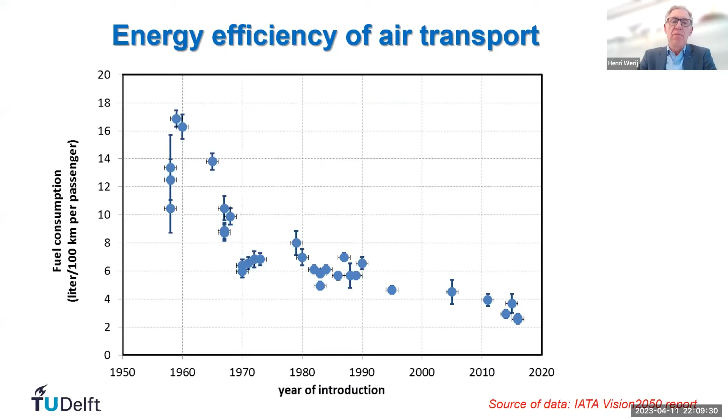First, a brief history of the evolution we've already seen in aviation regarding energy efficiency. What I plotted here is a graph showing the amount of liters of jet fuel per passenger per 100 kilometers, numbers similar to what you might see for your car. Of course in Europe it's liters per 100 kilometers, it's a bit different in other parts of the world. But what you can see is an improvement of about a factor of 5 over the last 60 years, due to advancements in aircraft design, weight, aerodynamics, better wings, and certainly improved propulsion systems.

The original jet engines are completely different from the turbofans we see nowadays, where a turbine drives the big fan in front, and only a small part of the air goes through the turbine, while the majority goes through the fan. Right now, the energy consumption per passenger per 100 kilometers is comparable to what you see in a really good car nowadays. Of course for a car it also depends on the number of people in it, but typically if you sit in a car by yourself, your fuel consumption is even higher than in an aircraft.

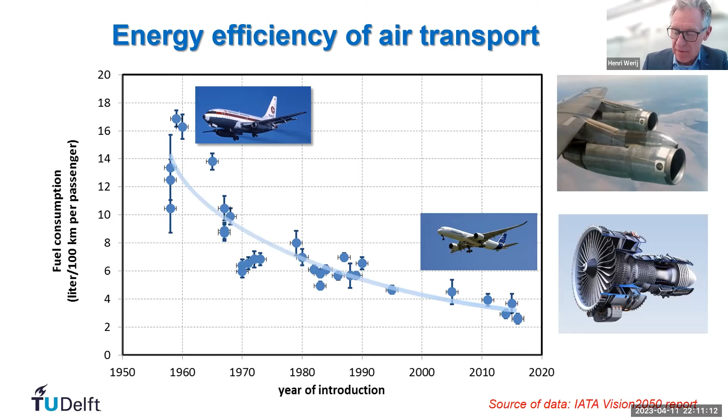So much for that. But at the same time, over the last 7 decades we've seen an exponential growth of air travel. More people travel, we travel more often, and we travel further, and this growth is continuing. Of course we had a dip due to COVID, but things are picking up again, and we see a doubling roughly every 15 years.

The improvements in aircraft design and propulsion engine design don't keep up with this enormous growth. This graph goes to the year 2012. Also, in the years 2013 to 2019, fuel efficiency worldwide improved by about 12%, but revenue passenger kilometers increased by 50%.

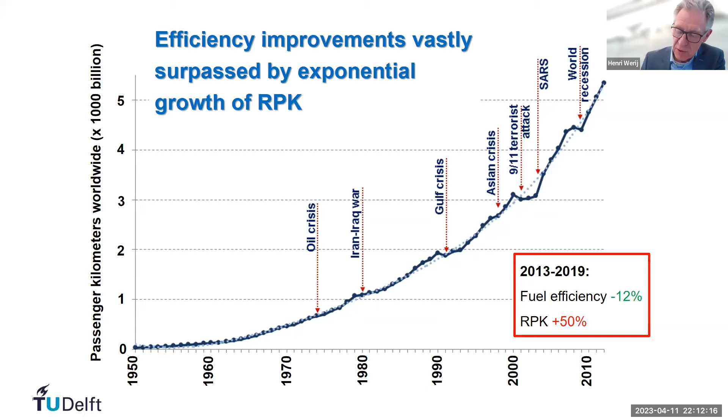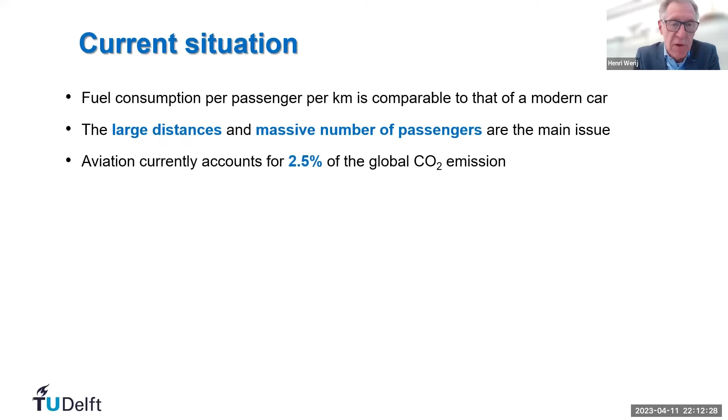That means the contribution in CO2 emission of aviation is actually increasing. If you look at the current situation, fuel consumption per passenger per kilometer is comparable to that of a modern car, but it's the large distances and massive number of passengers we are transporting. Currently aviation accounts for about 2.5% of global CO2 emission. And if in other sectors we are successful in bringing carbon emission down, the percentage of aviation will rapidly increase if we do not act.

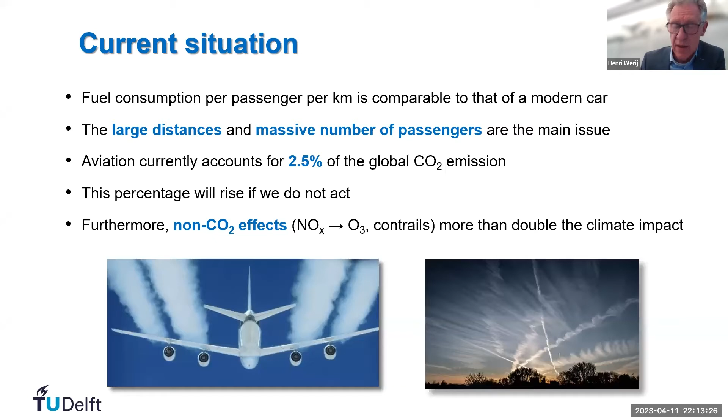So we have to do something. And on top of that, it's not just the CO2, it's also the emission of NOx leading to ozone, it's the emission of water, contrails, thin cirrus clouds that play a very important contribution to global warming. I will come back to that because this is a topic we definitely have to take into account right now when we start developing new aircraft and new propulsion systems.

So if we would like to do something about the climate effect of aviation, what knobs can we turn? Actually there are quite a few, and they are all interconnected. First, let's take a brief look at the forces acting on an aircraft. This is an aircraft in horizontal flight, where gravity is counterbalanced by the lift of the wings, and the thrust from the engines is counteracting the drag. Here we have to do something, and obviously we have emission, and this emission is something we would like to get rid of.

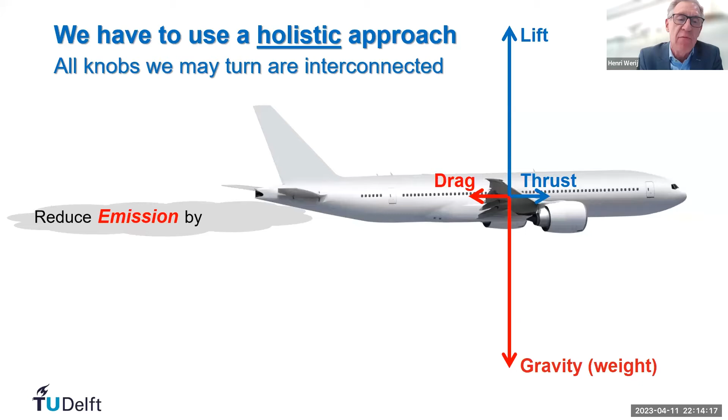How can we reduce the emission? First, we can replace fossil fuels by something else, I'll come back to that later. Whatever you choose, always make sure you have an aircraft that is as fuel, or should I say energy efficient as possible, which means a lot of lift, as little drag as possible, so high lift over drag, and a low mass, so it should be light.

Make sure you have energy efficient and clean propulsion systems, but also think about at what altitude do we fly, in what area or region do we fly, and how can we counteract the non-CO2 effects. And finally, if possible, use another transportation means than an aircraft. We don't always have to take a plane.

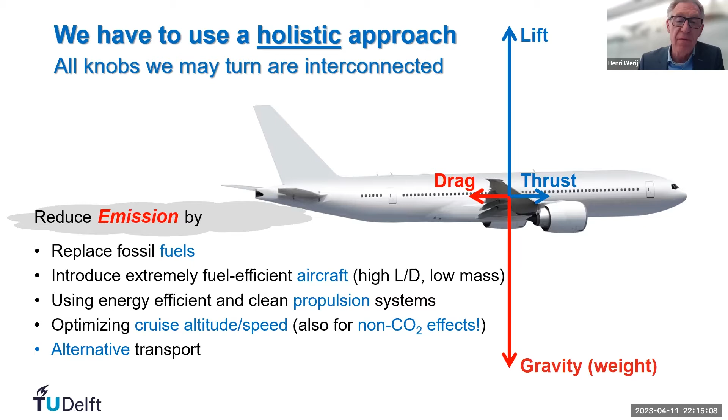So let's start with the first point, replacing fossil fuels. Well, that sounds easier said than done. What are the four main options that we have nowadays?

First of all, full battery electric. You see a lot of talking about this. Nearly every week it looks like a new company starts that claims they are going to fly huge distances, at least several hundreds of miles, using full battery electric planes. So that could be an option.

But electric could also rely on hydrogen and hydrogen fuel cells. Finally, hydrogen can also be burned directly, like we burn jet fuel, the kerosene, right now in a combustion engine.

You can use hydrogen, or we can replace fossil kerosene by sustainable aviation fuel. It could be made as biofuel, or even better - and we would have to do that if we need a large amount of fuel, where the bio route is not going to work, simply because we need too much - use electricity to ultimately create fuel again, just like the fuel we are using nowadays. Biofuel is not an option to replace everything, because we simply need too much land and too much water.

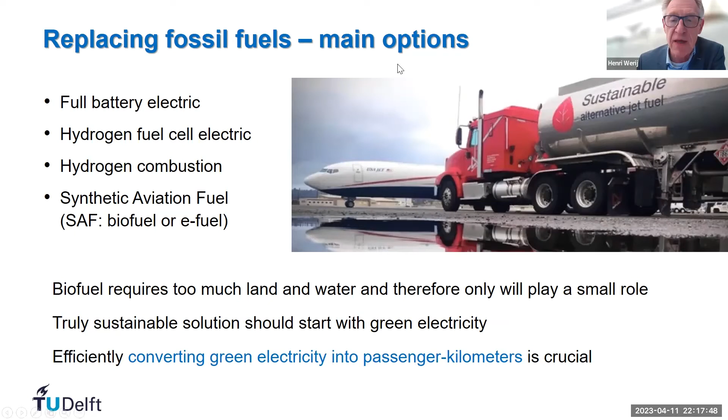So how do the four options compare? Well, the first thing you do is look - if we start from electricity, we somehow have to carry this on board of a plane and then bring it to the engine, to the propulsion system, in the most efficient way. And there it's clear there is one winner, which is full battery electric.

So if you have electricity, you can very effectively store it in a battery. From the battery, you get it out very efficiently as well, and send it to a highly effective electric engine.

So it's all wonderful. If you go the hydrogen fuel cell route, first we have to create hydrogen by electrolysis. Then we want to store it on board in liquid form, so we need energy for liquefaction. Then we send it back through a fuel cell, we have losses, and then it goes to an electric engine. But overall efficiency is roughly a factor of 3 lower than full battery electric.

Hydrogen combustion is nearly the same. What we do there is we have hydrogen and we simply burn it, so we miss the fuel cell part, but the combustion engine is a little less efficient than an electric engine, so it's roughly the same. And finally, we can make synthetic aviation fuel or e-fuel by using electricity to create hydrogen, capture CO2 from the air, and work this into fuel again. There the efficiency is even lower.

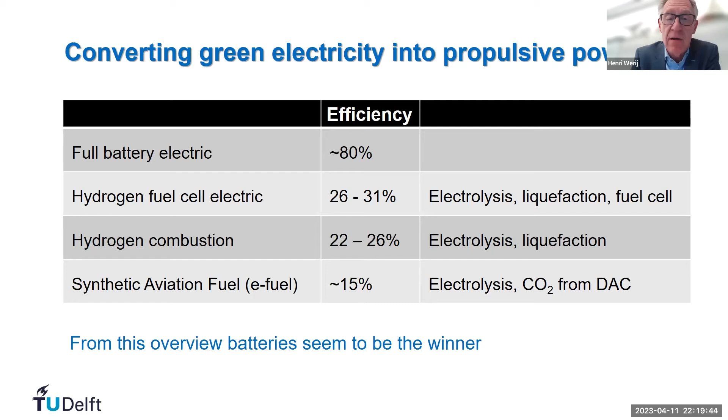So you might think batteries is the way to go, and this is what we see in automotive. Right now for passenger transport on the road, energy-wise, the battery route is the way you should go. It's better than hydrogen, I would say. But is this true for aviation as well? If you simply look at what is written and all the new companies that start, I think it must be the case.

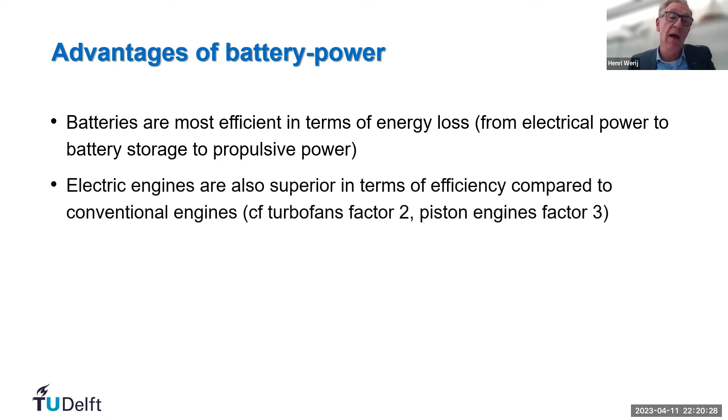I think this sheet I sort of explained already. So batteries are most efficient in terms of energy loss, from electric power to battery storage to propulsive power, highly efficient. Electric engines are also superior in terms of efficiency compared to conventional engines. So let's say you gain a factor of 2 compared to turbofans and a factor of 3 to piston engines. And in view of scarcity of sustainable electricity, we cannot afford wasting energy.

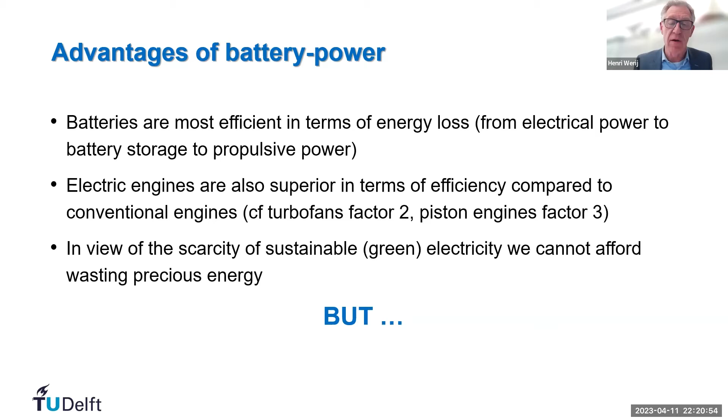So, should we go then for this battery route? It's a bit too easy if we only look at this aspect.

To take you along what matters, I'll take you into a range equation that you can easily derive from the four vectors that I showed before. It relies on the fact that the energy you need to travel a certain distance is the same as the force times the distance. In other words, the distance is the energy divided by the force, and that's what I'm putting in here.

What you arrive at then is the range. If you want to go from A to B, you need a certain amount of energy in the batteries divided by the total mass of the aircraft, including passengers plus batteries, times the ratio of lift over drag — I'll come back to what this number actually means for pilots — times the efficiency of the propulsion system. So it's a very easy formula, which is perfectly true for battery planes where the weight is constant.

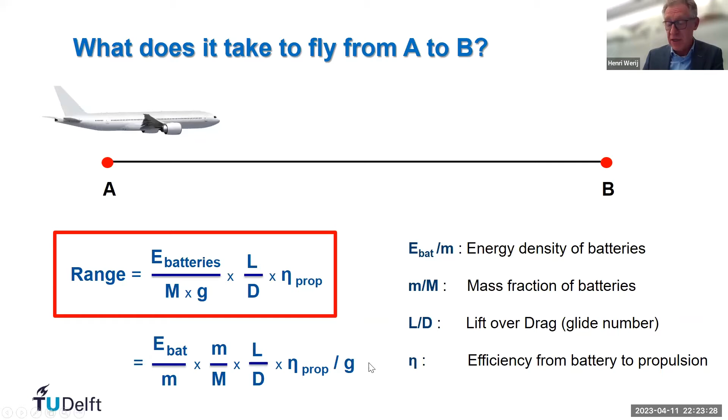So it's the total energy in the batteries divided by the total mass times the gravity constant times L over D times the efficiency. You can rewrite that by saying the energy divided by the battery mass is the energy per kilogram of the battery. So it's the energy density of the battery times the mass fraction of the batteries — let's say 10, 20, 30, 40% of the weight of the aircraft goes into batteries — times L over D times the efficiency, divided by the gravity constant.

So let's see where we would arrive at with numbers that are at our hand nowadays. First of all, let's look at the ratio of lift over drag, L over D. For those of you who are a sailplane pilot, you probably very much know what this number also stands for: the ratio of lift over drag is the same as the horizontal distance you can cover at the expense of the vertical distance lost.

So for instance, if you have a sailplane with an L over D of 27, it means in still air — no headwind, no thermals — you have a range of 27 kilometers for every 1 kilometer of altitude lost. It's pretty good. A Sparrow, roughly 4 — it's like a small flying brick, you could say. A small Cessna 150 is also poor, it's 8.

But passenger planes like an older one, the Boeing 767, and the newer ones, they are in the range of about 20, slightly more. Albatross, a beautiful soaring bird, 20. And then sailplanes, they go up to 27 for the entrance-class gliders, and for open class competition gliders, 50 or higher.

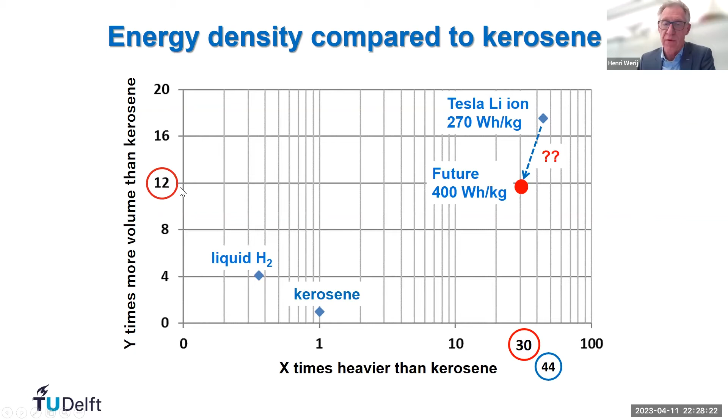In the future, going to 400 watt-hour per kilogram, weight-wise it's still a factor of 30 worse, and volume-wise it would be a factor of 12 worse for batteries. But we are not completely there yet. What I'm talking about is lithium-ion battery cells, and these battery cells have to be packed in a whole system for thermal management in a strong structure, and that will lead to additional losses.

So what I put down here, we have to take into account that there are temperature effects, and certainly in a plane flying at a higher altitude, not only flying during nice summer times, you have to take into account that you have losses due to low temperature and energy needed for heating. For those of you who are driving an electric car, you know how much your range is going to decrease in wintertime. In my car, it's more than 20%, but let's say it's about 20%.

We also have to take into account that batteries degrade, and the degradation you have to take into account right away. You cannot sell a plane which is meeting its specs on day one and not anymore after that. So you have to take into account 10% there.

Packaging right now for the Tesla Y model - they are doing it really in a very effective way. They add only an amount of mass that the energy density goes down by 34%. NASA thinks that for aviation, well, you should lose 30%. I'm even a bit more optimistic - I said let's say we achieve only a loss of 25%.

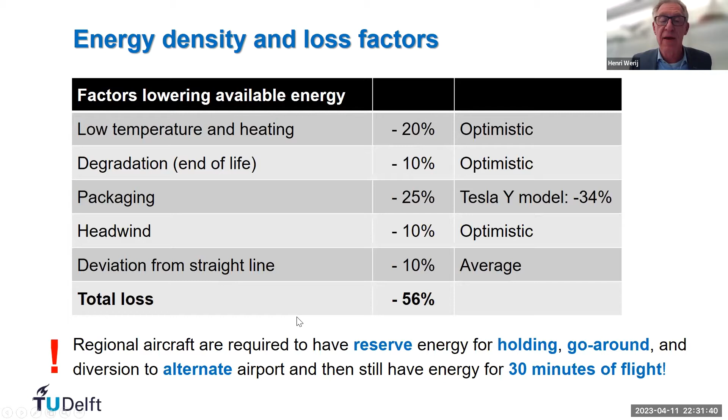So you start the landing and at the last moment you decide to not land, climb again. You have to be able to divert to an alternate airport. And when you arrive there, it is required that you still have energy for 30 minutes of flight, just for safety. Unlike a car, you can decide to arrive at the charging station being empty. In aviation, this is not what is allowed. And if you take all of this into account, this roughly leads to a reserve range that you need on the order of about 250 kilometers.

So if we stick the numbers in that we previously already had, let's say we have 300 watt-hours per kilogram. This is better than what we have in cars right now. We have an L/D of 22, which is also really good. This is an optimistic number. We take an efficiency of 80%, also on the optimistic side. And then we say we have an aircraft where 50% of the mass would be available for batteries plus payload. This is a high percentage, typically it's a bit lower. But let's say we are capable of designing planes in a different way. We have 50% of the takeoff mass, or the maximum landing weight, whatever, the same here, for batteries and payload.

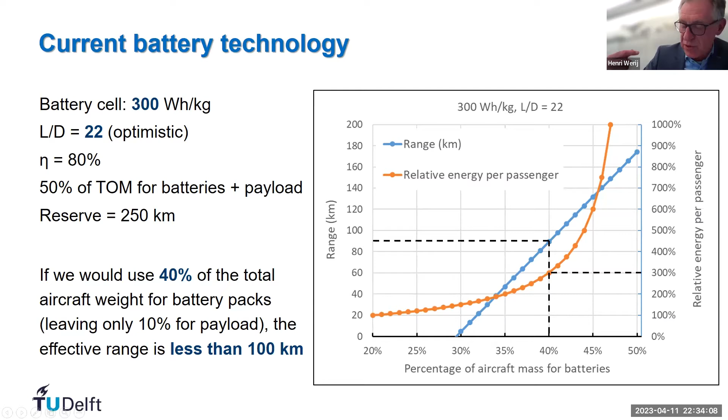Sometimes you hear Elon Musk say on YouTube that, wow, if we have batteries of 400 watt-hour per kilogram, then we are good enough for aviation. And he even starts dreaming about supersonic flight. This is really absolute rubbish, if I may say so, because even with 400 watt-hours per kilogram, if you put it in, you arrive at a range of about 200 kilometers, unless we would do really incredible things to the L/D. And that, I can tell you, is really hard.

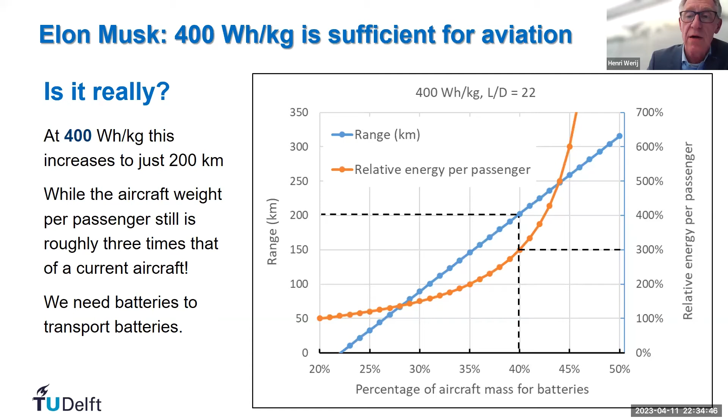So, perhaps also another myth buster. People say, yeah, but we can use a range extender, put solar cells on the wings of your plane. And yes, it has been done. We have here an experimental aircraft, of course no passengers, 600 kilogram, a huge wingspan on the order of, what was it, a 747, this order of magnitude, very light.

It was so light that it essentially, when it hit some unexpected turbulence, it broke in the end. But there you could stay aloft, though you would need huge wings to capture the light, of course only working during daytime when the sun is coming straight from above. It can be used for very low, slow flight and a very small payload. In Switzerland, they are trying to reach the stratosphere with a plane which will be solely relying on solar energy on the wings.

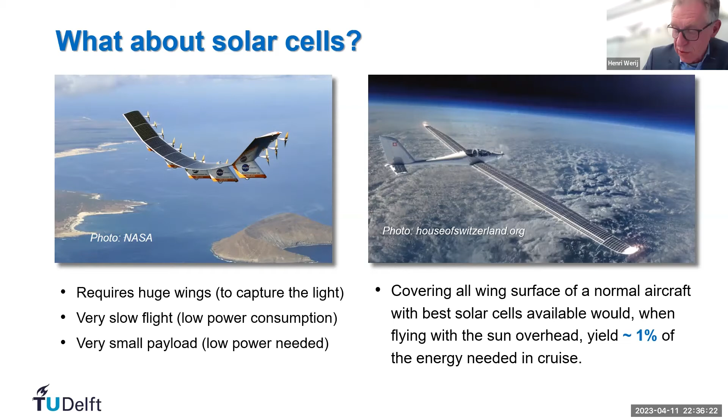But if you calculate this for a normal plane, what you can get is about 1% of the energy needed in cruise under ideal conditions, when flying over the equator at noon, when the sun is coming straight from above. And yeah, let's say we have energy for the onboard entertainment system, and this is it. So this is not going to be a solution.

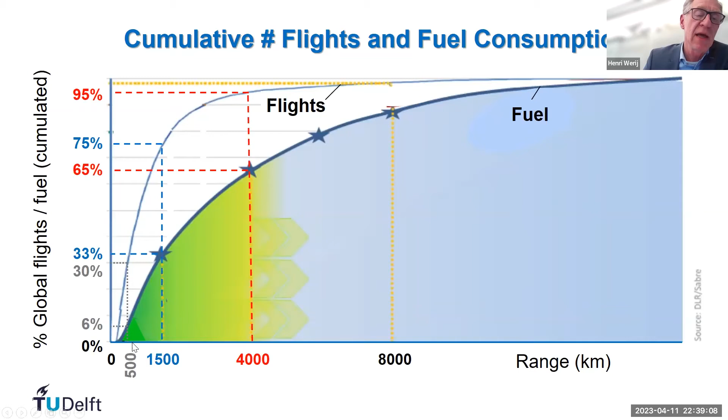If we look here and say up to 500 kilometers, it's 30% of the flights worldwide but only 6% of the fuel. If we go only to 200 kilometers, what I just calculated, that's a few percent of the flights, but it only accounts for roughly 1% of the fuel used worldwide. So if we talk about battery planes, pure batteries only, this is not going to save us, because we're talking about a 1% level.

I'm not saying we shouldn't do it, and there are certainly cases where you can and should, but typically this is not going to be the big world-saver for climate effects from aviation.

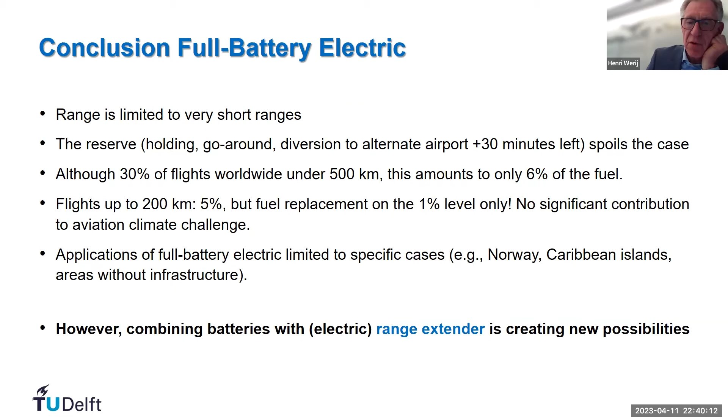The point, however, is since this reserve is so detrimental, if we can take another energy carrier on board for this reserve, then things become more interesting, and this creates new possibilities.

One of the serious options, and an obvious one, is the use of hydrogen, and hydrogen with fuel cells. Again, in the same graph I showed before, I compare liquid hydrogen to kerosene, and I see that the energy density for hydrogen is roughly 3 times higher per kilogram than it is for kerosene, for jet fuel.

However, you need roughly 4 times more volume, not even taking into account the tanks it has to be stored in, and it will have to be stored at cryogenic conditions. Under a pressure of 1 atmosphere, liquid hydrogen has a temperature of 20 Kelvin, minus 253 degrees centigrade, and we have to keep it that cold.

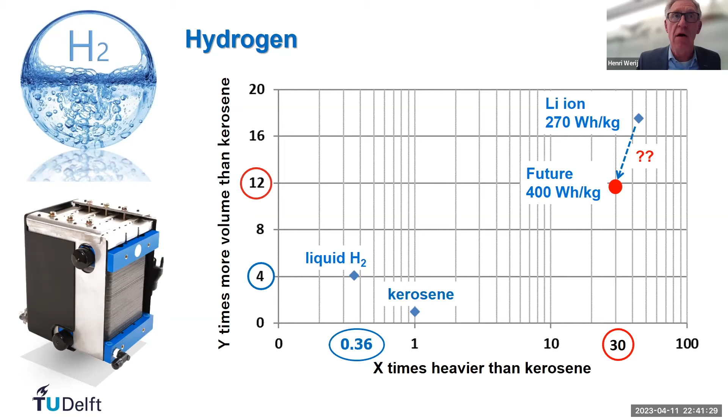But you see, mass-wise, hydrogen is actually very interesting, where of course we have to take into account the weight of the fuel cells and everything like that.

For hydrogen fuel cell electric planes, a lot of research is going on right now. Several companies around the world, and also in Delft, even a student team from our university, are building a plane that will rely on hydrogen fuel cells, taking liquid hydrogen on board. So a lot is going on, but there are also some issues.

One of the issues is power density, the amount of kilowatt per kilogram. For batteries it's mainly the energy density—the joule, megajoule, or kilowatt-hour per kilogram. Here, for hydrogen fuel cells, it's the kilowatt per kilogram that is the limiting factor.

This could mean we need batteries during the takeoff and go-around phase. So again, also for hydrogen, it's important to have some batteries on board. Before I said we need hydrogen as a range extender for the batteries, but we also need the batteries as a power extension for hydrogen. This is interesting to keep in mind.

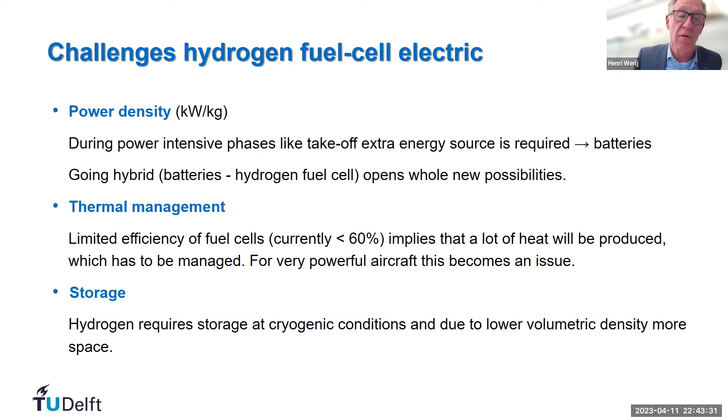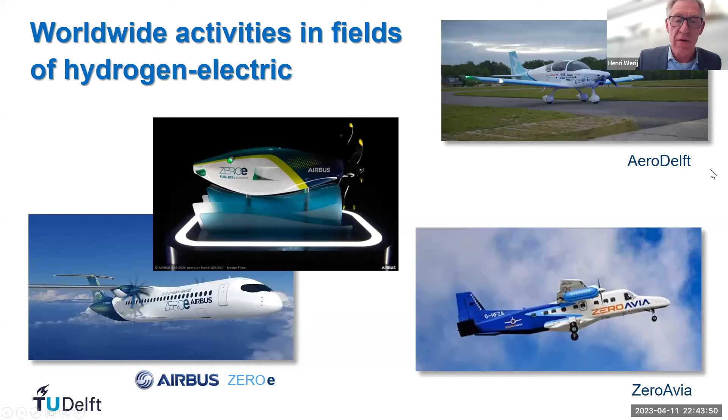So these are things that we actually have to work on very hard to make hydrogen fuel cell electric the way to go. But there are many places in the world where this is going on. Universal Hydrogen in the US, ZeroAvia in Europe, ZEROe Airbus is looking into that, AeroDelft in Delft. So a lot of work is going on there.

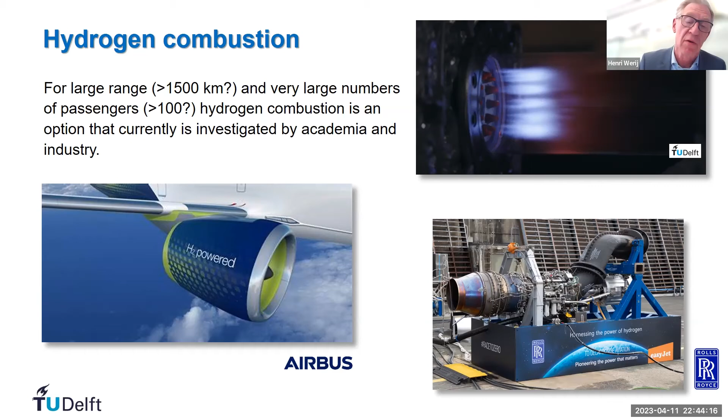Then finally, looking into hydrogen again, hydrogen combustion is also a serious possibility. That might be perhaps for a range more than 1,500 kilometers. I don't know where the cutoff point is going to be, or for larger aircraft, but hydrogen combustion is an option that is currently investigated by many parties. Rolls-Royce, Airbus, TU Delft, many other places are working on that.

This finally is a graph where I show the importance of hydrogen anyway. So if we start with electricity, we can, by electrolysis, create hydrogen. But when we combine that with CO2 captured from the air, direct air capture, then we can work this into sustainable aviation fuels, e-fuels. So hydrogen, regardless of what you do, is the option to go for aviation.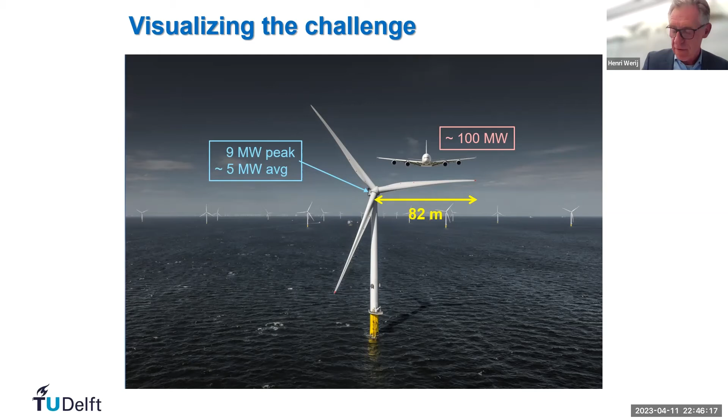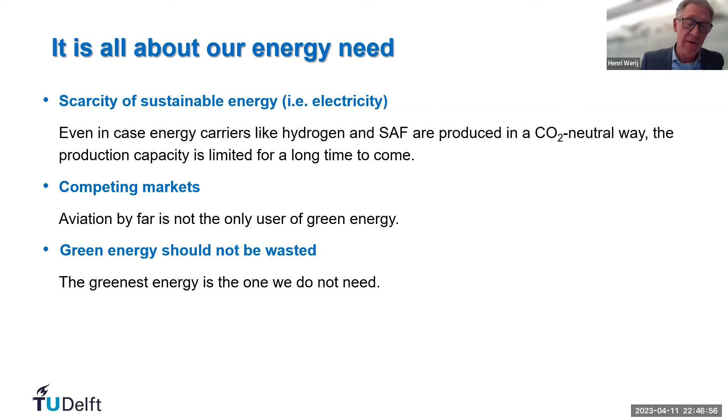So it's all about energy need, and that also means that we have to be very careful about how we are going to use this energy. We will not have enough for a long time because we need so much. There will also be competing markets, so the world is not waiting for aviation to use their green electricity and green hydrogen. This means that whatever we do, green energy should not be wasted. In other words, the greenest energy is the one that we do not need. So make the aircraft as energy efficient as possible.

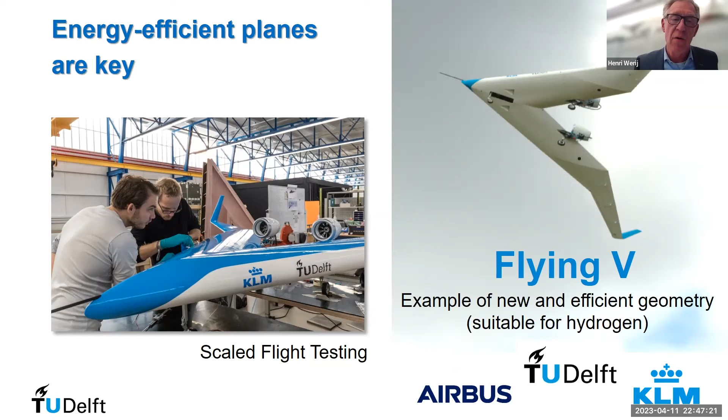Well, that's one of the things that we're working on in Delft, together with Airbus, together with KLM. It's a new concept, which is interesting because the shape also allows us to carry hydrogen on board. I'm not saying that this is ultimately going to be the plane that we are all going to fly in, but it's really a serious concept that is being studied.

I also would like to make one remark on supersonic flight, and I think this is important too. I read, especially in the US, people dream about supersonic flight again, and they say, well, this is sustainable because we use sustainable aviation fuels, so therefore it's green. Well, to be honest, I don't think so, because the fuel that you need per passenger per kilometer is roughly one order of magnitude, 10 times higher, than what you have in a subsonic economy seat. So this means that you're really wasting the energy that we don't have enough of.

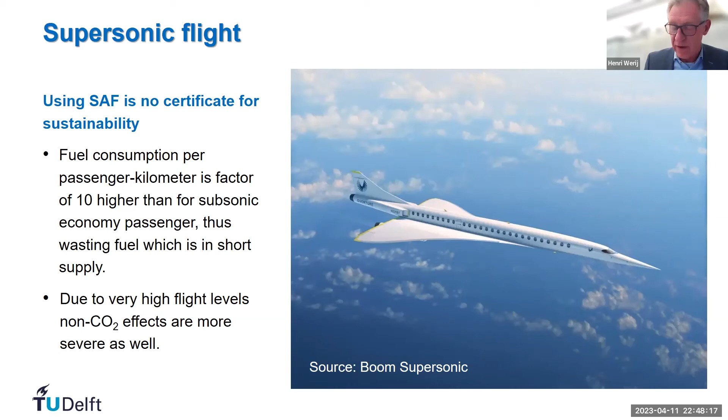And then furthermore, due to the very high flight levels that you use, the non-CO2 effects are much more severe than what we have in current aircraft. So this is definitely, in my opinion, not the way that we should go.

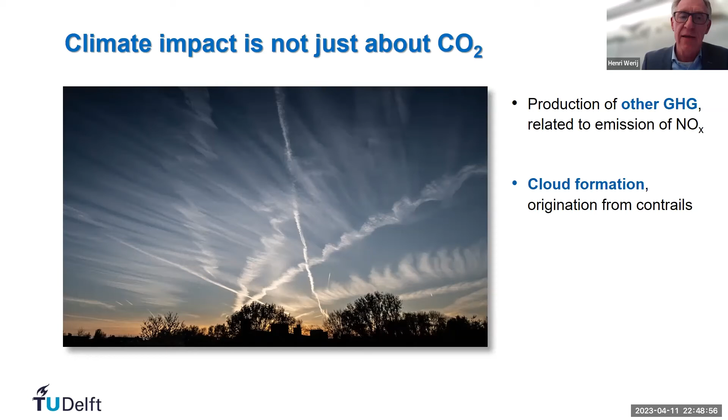So this brings me back to the point that climate impact is not just CO2. It's also what kind of clouds we create. Here we see some contrails. This is a picture I took from my study room at home, and what you see are contrails. There was a certain wind gradient, and you see these contrails actually spreading in the horizontal direction, creating a fairly stable cirrus cloud, and that acts, this was in the evening, as a blanket also for the Earth, for heat escaping. And this is what we have to take a look at as well.

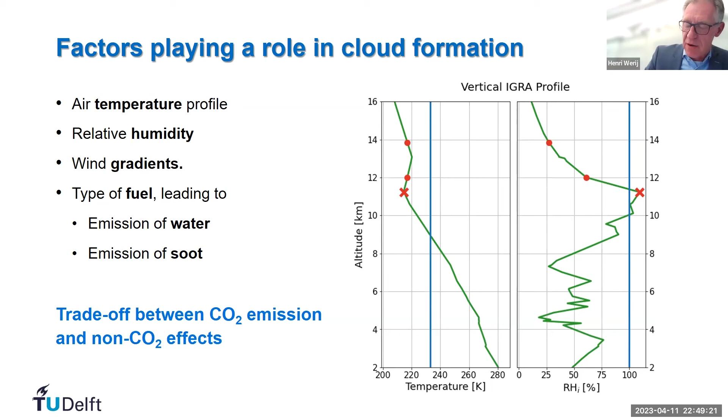This is being studied too, because where you get these contrails depends on what altitude you fly, what the humidity is, what the wind gradients are. You can look at the atmospheric conditions, and sometimes by flying a little bit higher or lower, you can actually minimize these effects.

Studies are currently going on. Also here in Delft, colleagues Esther Roosenbrand, Junzi Sun, and Jacco Hoekstra did a study looking at areas where people fly a lot, asking what kind of gain could we get by simply flying a few thousand feet lower or higher. How much could we gain? And the gains we could get there are really tremendous.

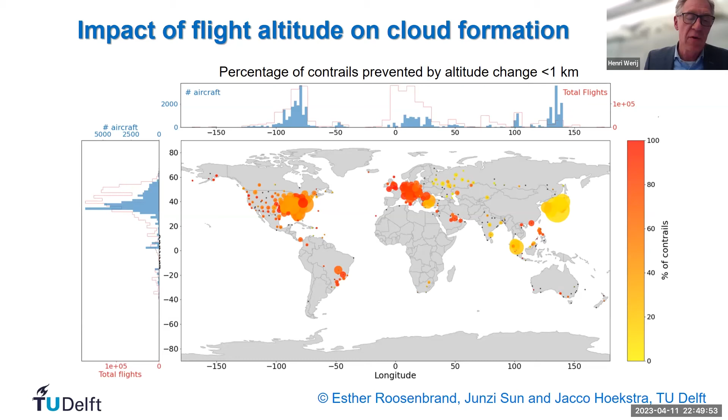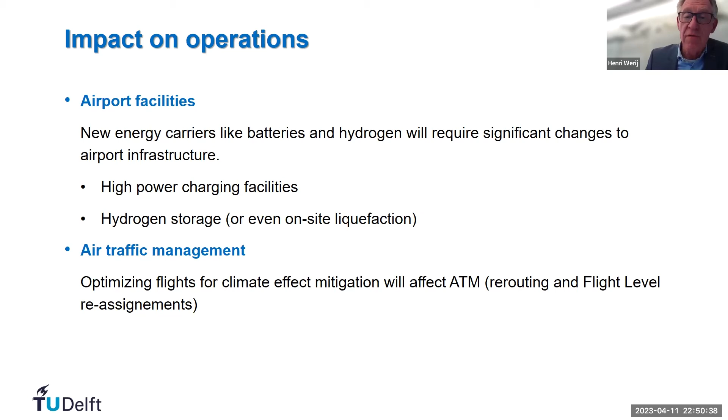Obviously this is going to have an impact on operations as well, and I think this is important for all of you. If you look at the changes occurring in aviation right now, it's clear there will be big challenges for airport facilities. If we use batteries or hydrogen, we need significant changes to the infrastructure: charging facilities, hydrogen storage, and perhaps we even want to liquefy hydrogen on site. That's something to be looked at. But also in air traffic management, when we want to optimize flights for climate effect mitigation, we'll have to take this into account. Rerouting and flight level reassignments are going to be important.

Well, I hope I didn't talk too long, but it brings me to the conclusions. There is no one silver bullet for replacing fossil fuels. It depends on the range you fly, the number of passengers, and we have several options. What is the best option for a certain range has yet to be seen, but I've sketched what we are currently looking at. Also very important to remember: climate neutral aviation requires more than carbon neutrality. That is really a very important point.

All that we do will have a big impact on airport infrastructure and air traffic management. And finally, perhaps the most important message: regardless of the choices we make, conscious use of energy is crucial. Whatever we do, we must not be wasteful. This is what I wanted to tell you.

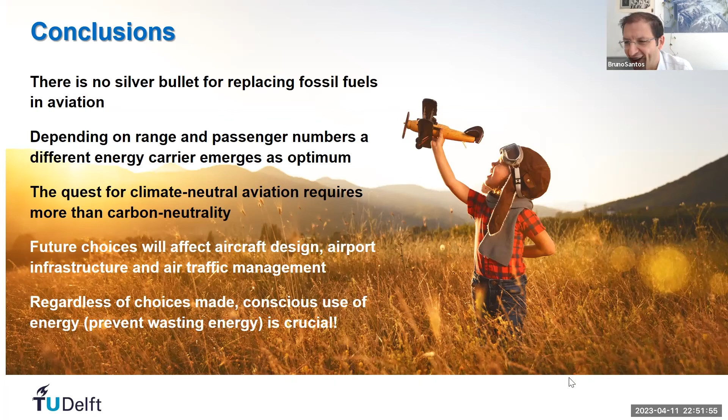So Henri, Marius first thanks you for your presentation, then raises this argument: that emissions at high altitude have a much higher impact on the ozone layer than those produced at ground level. Does this statement still hold in the case of an atmosphere that is not stable, with winds and weather impacting these emissions?

It's not just about the ozone layer, and I have to admit I'm not the expert on these effects. There are other colleagues in Delft who have been working on this, and also at MIT AeroAstro they have studied this as well. But if you go high into the stratosphere, the processes taking place there are different, and the lifetime of what you deposit there is longer. What researchers who studied this say is that the effects of depositing your emissions there are larger than the climate effects of emitting lower, where there is more turbulence and the lifetime of your emission is shorter. But again, people like Feijia Yin and Irene Dedoussi in Delft can tell you a lot more about that. So Marius, if you want to know more, just contact me.